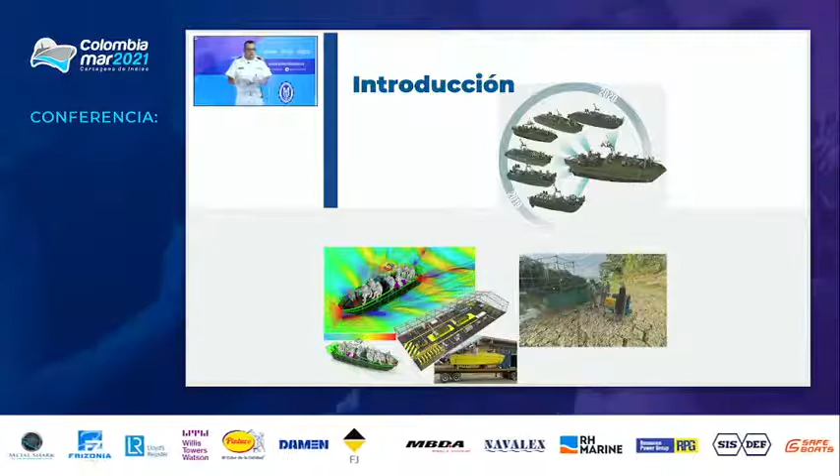Now for this, there were no obstacles. We ran validation tests to be more certain of the complex challenge that lay ahead of us. And this prototype boat we used to validate simulations and to make corrections and modifications to the design. Now, this is the operational requirement that was received from the Western Naval Force.

It is a low draft fluvial combat boat, and what's innovative here? Normally, low draft boats that navigate in shallow waters are characterized by their light weight, but the operational requirement was truly demanding. It was a boat with a capacity of 5 people, additionally a load capacity of 4 people for a total of 9, 400 kilograms of load, autonomy of 300 kilometers, which required enough fuel on board, and we had ballistic protection above the flotation line, which made it a boat no longer categorized as a light boat.

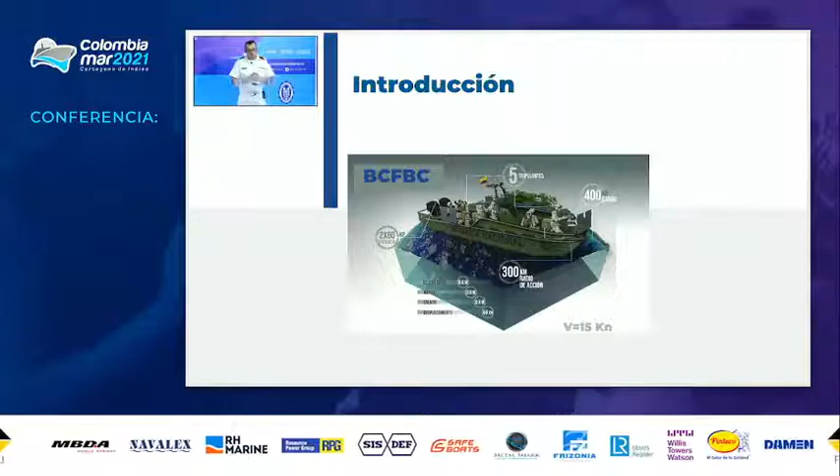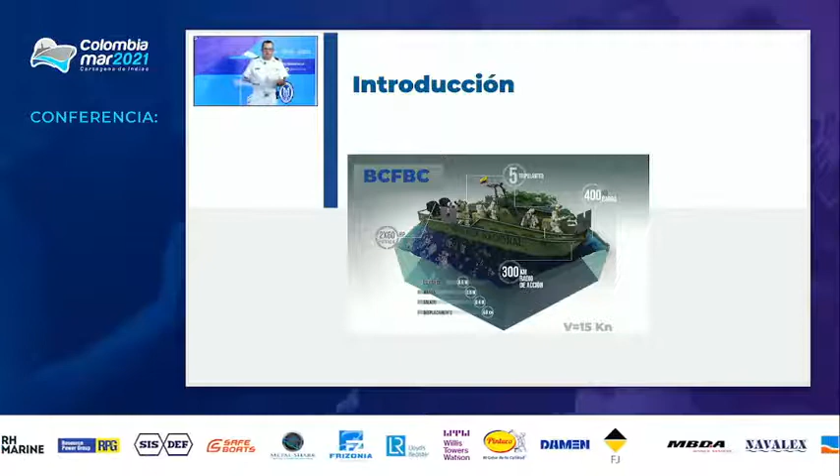Actually, we had a restriction in terms of design, and it was the power. Normally during the design, based on the speed that one might need to achieve, you calculate and forecast the power to be installed to meet that requirement. Now we had a strong restriction, which is that the maximum installed power was 120 horsepower in a 2-engine configuration, each a 60 horsepower engine. So we had these dimensions, which were modified in the subsequent process.

How did we run the numerical simulations? Well, we did 2 types of simulation, one in deep waters and another in shallow waters. They have some significant differences, but also some common things. With the simulations, we solved the modeling of the turbulence with k-omega SST. We used a time step condition, which we applied at the free surface. That is, these surfaces were monofluid, and we applied a restriction on the time step at the free surface so that the number was less than 1.

Now, the computational domain we defined based on the recommendations for ITTC planing boats. For the mesh we used two, one for deep water and another, a multi-mesh, for simulations in shallow water. I will explain them. These simulations were run on our server, which can be considered a high computational power server. We have 128 processors, 256 at 2.25 gigahertz, 512 gigabytes of RAM, and in total it was 128,000 hours of computation without counting the optimization process.

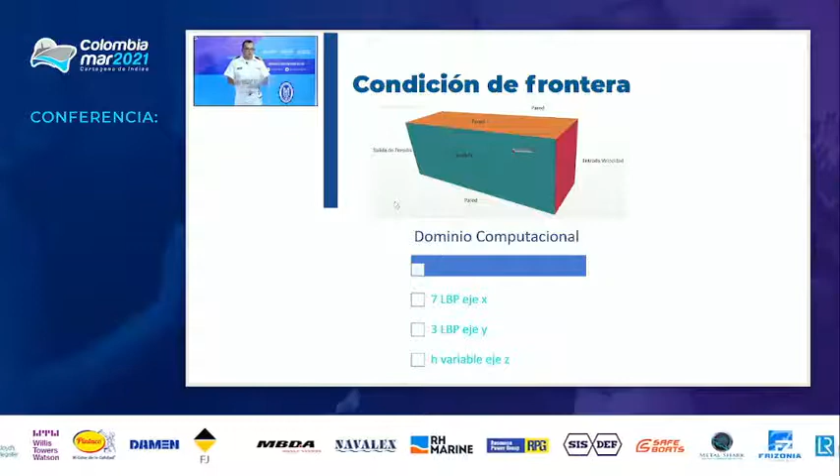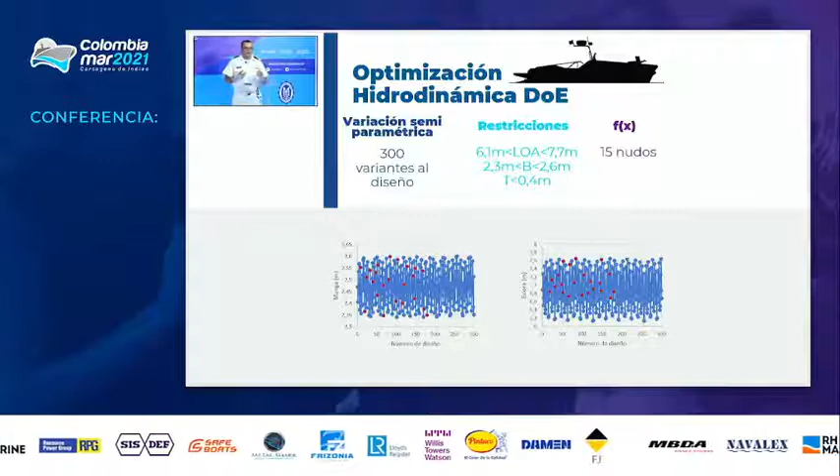Now, with respect to the dimensions of the domain, we followed the recommendations of 7 lengths in the X and 3 in the Y, and in the Z axis, the depth. So to define the forms, we did hydrodynamic optimization. We applied a semi-parametric variation on the initial hull, for which we obtained 300 design variants. What is it? Well, we take a hull that we can use as initial geometry, and we apply restrictions, minor modifications, not varying the nature of the design much. For this specific case, we applied scaling in the 3 dimensions.

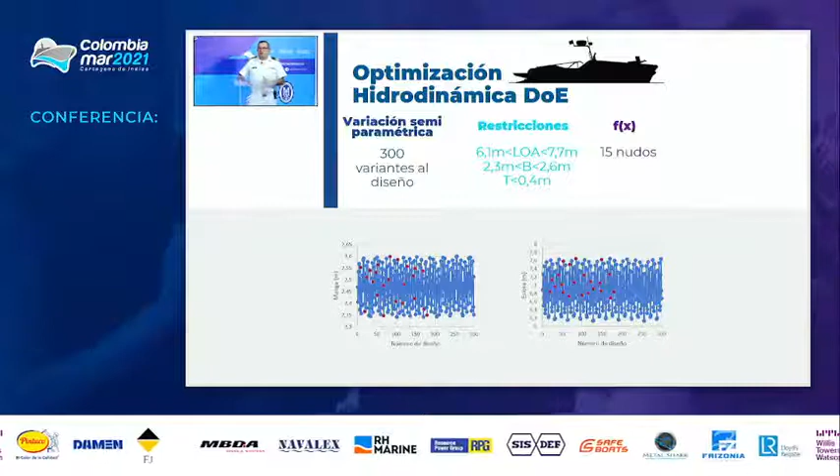Now, which restrictions did we add in this experiment? Minimum and maximum dimensions in the length, in the beam, and in the draft. By restrictions, we meant the load capacity, and the displacement was very high. So to reduce the dimensions significantly forced us to have a very high draft, which was going to increase. This optimization process was done for a speed of 15 knots.

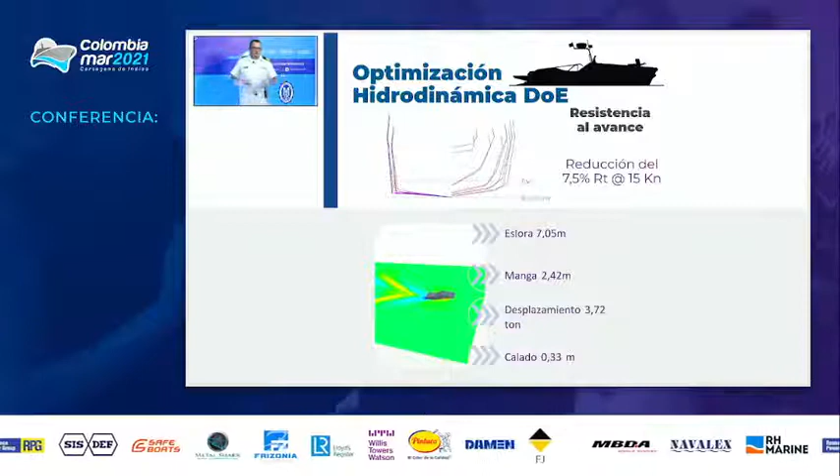Now we can see here the difference in the forms. In blue, we see the initial hull, the prototype boat's hull. And in red, we see the forms of the optimized boat. In the end, we managed a reduction in resistance of 7.5%, and we used a length of 7.05, a beam of 2.42, displacement 3.72, and a draft of 0.33. This forced us to have a boat with a very low keel to be able to meet these operational requirements.

Now, with respect to the configuration of the mesh and the simulation, I previously mentioned that we used 2 techniques. One is overset mesh, and the other is morphing mesh. Now, in these sorts of ships, what happens? They are subjected to drastic pitch and roll movements. So how did we solve this problem during the simulation? Well, we applied initial trim to all the simulations based on the speed that we wanted to analyze. To initially apply this trim, we used the Savitsky series, which gives us pretty useful trim values during early design phases.

Now, for deep water simulation, we use the overset mesh, and that creates 2 domains: the internal domain, which follows the movement of the boat throughout the simulation and generates an interpolation, a connection with the external domain to obtain the condition. For these simulations, we used about 2.5 million cells. And for shallow water, we could not use this manner of meshing due to the shallow depth. We ran the risk that the boat's movement would render this domain outside of the computational model.

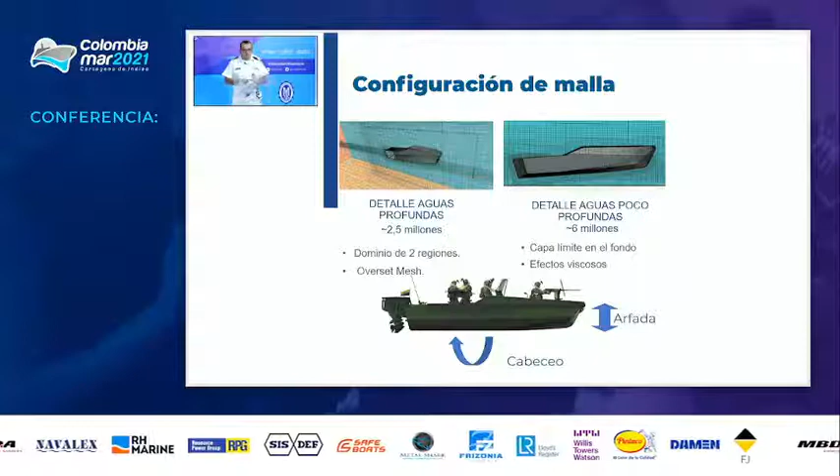So we used the morphing mesh model, which is deformed in one sector according to the movement of the boat. Also, in shallow water, you cannot overlook the viscosity effects. So you need to add a boundary layer, which will represent the bottom of the boat and the river bottom. These will generate viscosity effects, which are highly important in shallow water. So we needed to apply a boundary layer condition, and we could not impose it with a sliding condition. The simulations in shallow water were about 6 million cells each.

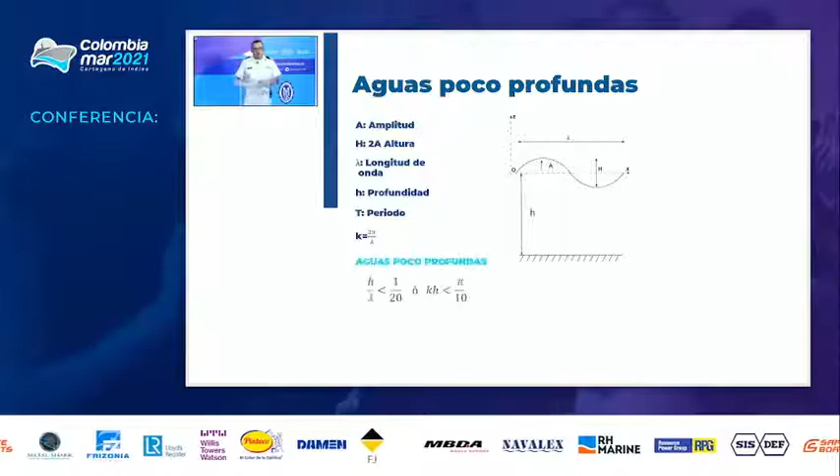How do we know when a boat is navigating in shallow water? Well, there is a way of describing it, which is by describing the surface waves. We know that waves are characterized by the amplitude, the height, the wavelength, the depth, and the period. And likewise, they have a wave number, K, related to the wavelength. Now, from the standpoint of engineering, how do we know that a wave is a shallow water wave?

Well, then we have two relations. When this depth over the length of the wave is less than 1/20, or when this number of waves that I mentioned before falls because the depth is less than pi over 10, there we know that we are working in shallow water. And the equation of the speed of a surface wave, we describe it here as we can see it.

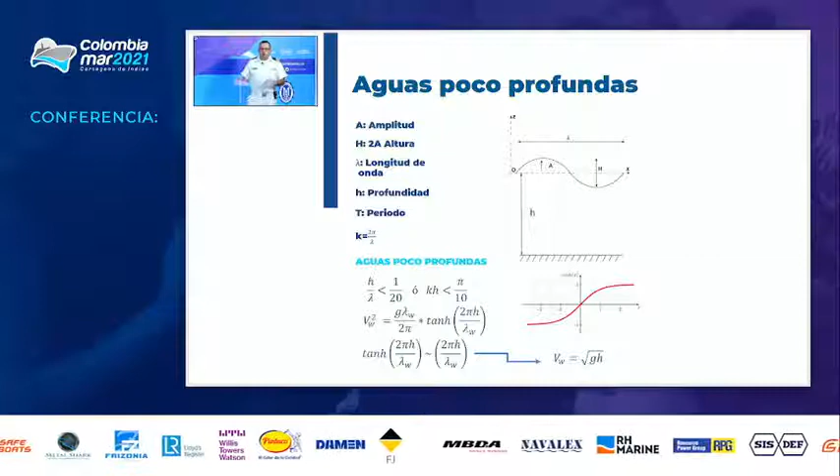What happens with this term, the hyperbolic tangent of two pi times the depth over the length of the wave, in shallow waters tends to 0, for which we can assume that this term is approximately the same as the depth over the length of the wave. And this allows us to define that the speed of a surface wave is the square root of the gravity times the depth. From this term comes a figure that is very important, which is the depth Froude number. As I said, this is the relationship between the forward speed of the boat or the body being analyzed over the square root of the gravity times the depth.

Now, what is the importance of this slide? In terms of the simulations and the performance of boats in shallow water, or ships in general, there are 3 regions: a subcritical, a critical, and a supercritical region. In these regions, different behaviors occur in terms of resistance to the forward movement. In the subcritical area, at depth numbers of less than 0.7, these effects are not significant.

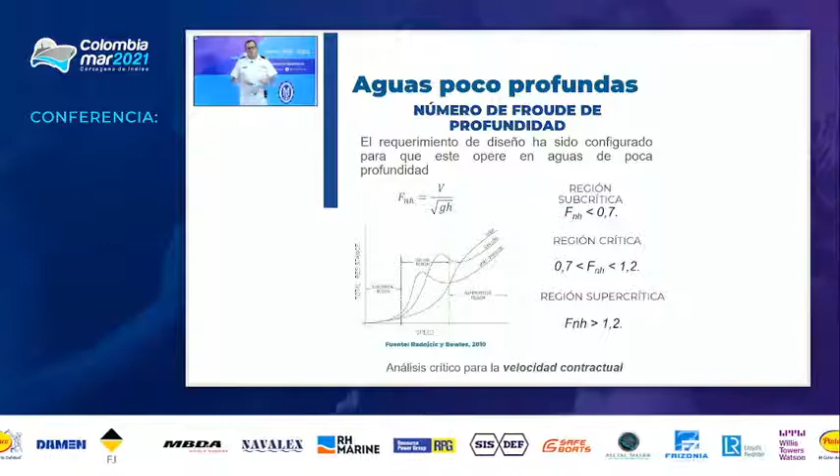And there is, from the standpoint of the design, a region that is very interesting, which needs to be studied, which is the critical, when you have the number from 0.7 to 1.2, where the resistance to the forward movement generates an impact. So there is significant resistance to the forward movement, and this is vitally important because that is what limits our being able to get the boat to a proper speed. So after this, in the supercritical region, you obtain a reduction in resistance to the forward movement. All this is theoretical, and it was proven in the simulations.

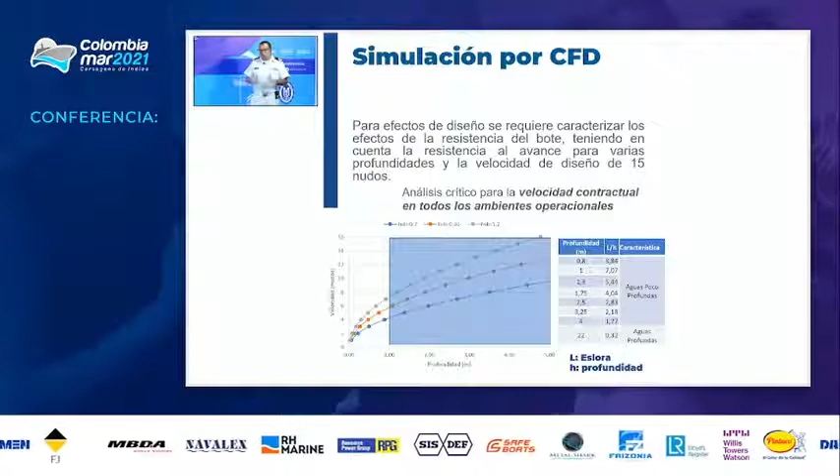Now, simulations were run at 7 depths in shallow water, and they are commonly expressed as the depth where a ship is flowing in relation to the length. This means that when the relation is low, the boat is navigating in deep water, and when it is high, it is navigating in shallow water. Now, the power of the boat was really reduced, and the speed was very much at the limit of that prediction of resistance. Additionally, these marine infantry boats, as you can see in the graph, normally navigate in waters of 1 to 5 meters, which shows that this relationship of the length and the depth and the Froude number shows us that these boats are experiencing these effects of the shallow water.

Over here we have the results of the resistance to forward movement simulation, and we can see that the results of the effect of resistance in shallow water, which is the starting point for the design, were very similar to the maximum peaks of resistance obtained at a low depth. And the importance and the challenge of this design is here. See, because in every operational setting, when the boat is navigating in shallow water, this increase in resistance could not be too high, or we would not have enough power to overcome this peak and then achieve a contractual speed.

In case those 120 horsepower installed would not have been able to overcome those resistance peaks, it is the difference between the boat getting to 15 knots or a little over, or staying below 7 or 8 knots according to the depth. Now, this would not be a significant problem when one does not have a limitation in power, because you guarantee that that maximum peak of resistance will be overcome easily. But this was our main challenge and our main concern.

Now, a way in which the academy demonstrates this behavior of resistance to forward movement is by a graph based on total resistance and the depth Froude number. And here we can see that the biggest effect occurred at depth numbers between 0.9 and 1, having a maximum peak at 0.95, which adds great value to our work, because the simulations were validated with what little theory exists. Actually, the state of the art in shallow water, there's not that much. There are some studies for fast moving boats, Series 60, Series 62, but we didn't have bibliographical sources in shallow water, and much less experimental validation campaigns as we did for this work.

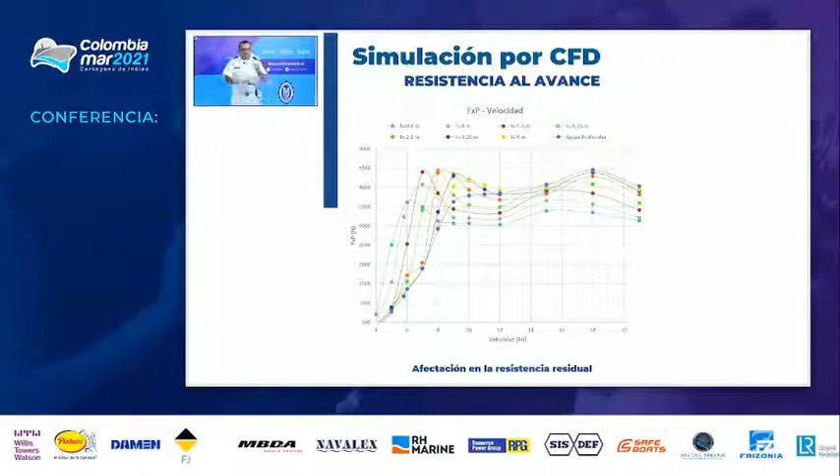Now, this change in the resistance to forward movement does not happen with every component of resistance. We know that there's a viscous component and a residual component. The change in resistance to forward movement occurs in the residual component, but it is the component of greatest importance in resistance to the forward movement, accounting for about 90% of the resistance. In the viscous, you get a reduction, but it's not significant.

How can we also validate our studies? Well, as I said, the theory and the state of the art in shallow water is not extensive, and experimental trials are very much limited. First, because they're costly, and second, because for a model basin to validate that it's somewhat hard. So experimental tests are limited to maybe 3 or 4 different depths.

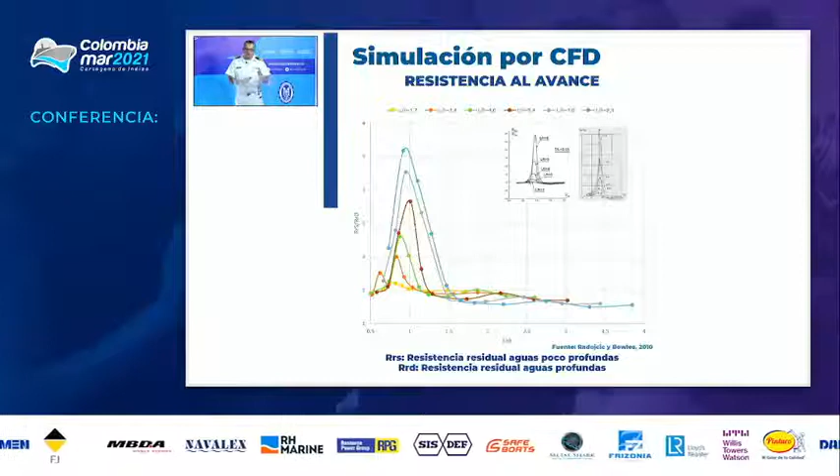We analyzed a total of 8 depths, and we can show them in this graph, which is based on the length over depth relationship that I commented about, and also creating a ratio between the residual resistance in shallow water and residual resistance in deep water. Over here, we can see that the performance obtained was the same. Radojcic and Bowles, who are the ones who have worked the most on this topic, resistance, the pattern was completely similar in the critical area, in the 0.9 to 1 in the depth number.

Another aspect of interest and highly important for the Navy, for the Marines, is to understand the pattern of waves that is generated in shallow waters. Traditionally, we in naval architecture know about the Kelvin pattern, which is made up by divergent waves and transversal waves. This divergent wave is 19 degrees with 28 minutes, but this pattern only keeps up to a Froude number of 0.4. Now, what happens when we move above the 0.4? The pattern of waves is totally different. In the critical zone is where we must focus our interest and operational teaching to the pilots.

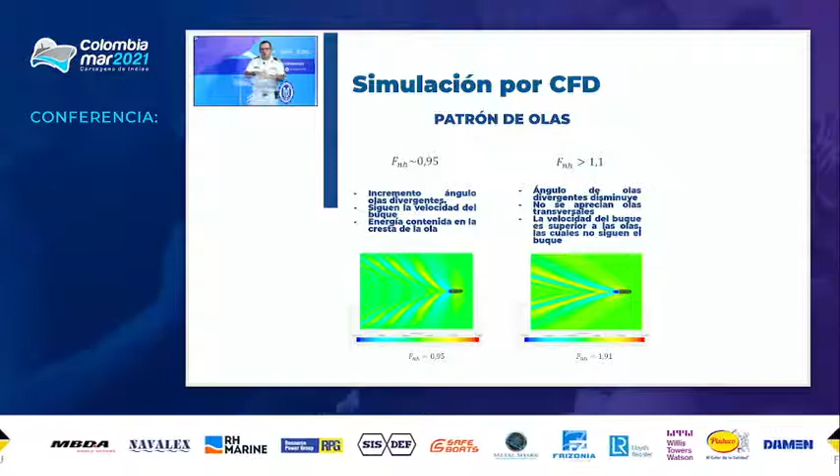Because in this condition, because of the definition of the Froude number that I showed you, the equation of it, we can determine that the speed of the boat over the speed of the wave is going to be the same. So in this Froude number, the wave follows the boat as if it were navigating with it. Now, what happens in this condition? You get a peak at the height of the wave, and therefore the energy of the wave.

And this is vitally important because when a marine boat is navigating in this regimen, we normally navigate in riverside populations where you have small boats which could easily be affected by this energy of the wave. So we also transferred knowledge on the speed at which they should navigate to prevent these problems, if it's a speed below this critical Froude number or above, when this energy is reduced.

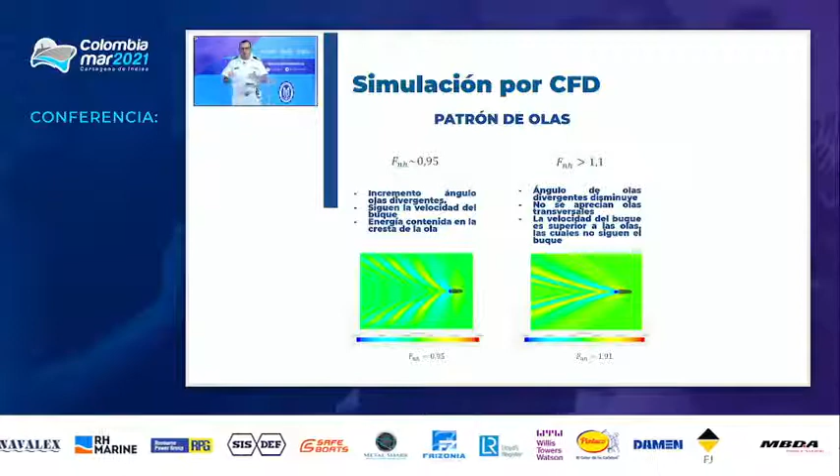Now, when this number exceeds 1.1, the wave pattern changes completely. You only see the divergent wave, and its angle is reduced drastically. In that condition, the speed of the boat or the body is so high that the wave pattern is not capable of following them.

Lastly, we ran some validation tests, and the validation tests were not limited to speed tests. At the corporation, to validate this model, this design, to be certain of their performance, we did speed tests in actual live operational areas, maneuverability, tactical angle, longitudinal and transversal angle, which will be presented in a future article. But in this particular case, I will show the results of the experimental tests, speed tests.

We did these tests in Cartagena. For those of you who don't know, Cartagena is a city in the department of Bolivar, located on the Colombian coast. And in its internal bays, we did the test on shallow water with a depth of anywhere from 16 to 22 meters, and the Froude number ratio for the boat was 0.3. In this navigation condition, we reached a maximum speed of 16 knots. We also ran some tests in the back canal, also within the Bay of Cartagena, and we found depths of 2.5 and 3.5 meters.

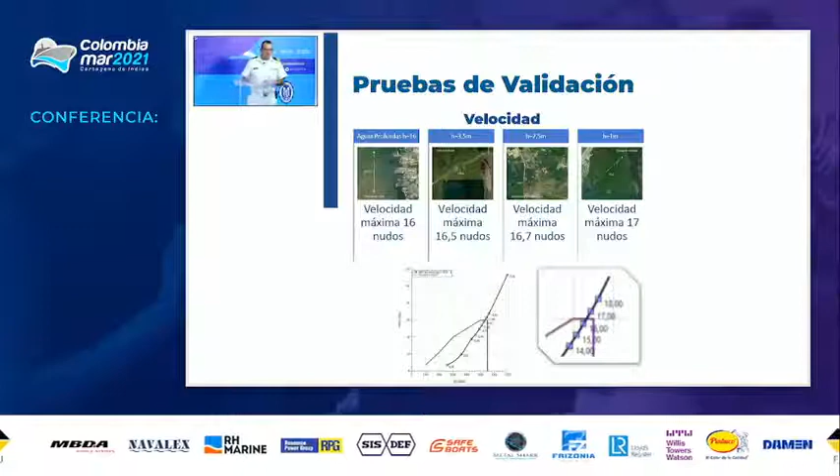Now, as conclusions, we see that the results of the resistance to forward movement in shallow waters were completely coherent with the experimental studies and the existing numerical studies, which, as I said, are very scant. The subcritical, critical, and supercritical areas were identified, and the change in the resistance to forward movement in each, right? The critical area being the most important one.

And in the supercritical, we obtained a reduction in the resistance to forward movement, which ultimately led us to a higher speed. And that's the next conclusion. We evidenced an increase in speed at a Froude number greater than 1.1 as a consequence of the reduction in resistance. We also verified that the variation of resistance is due to the residual component and not the viscous component. Also, the generation of waves.

To be able to tell the crews that they have to be careful when navigating in this regime, because, first, the resistance is highly affected, and second, the wave generated by the wake has a lot of energy, and it will generate damage for the riverside population and other smaller boats.

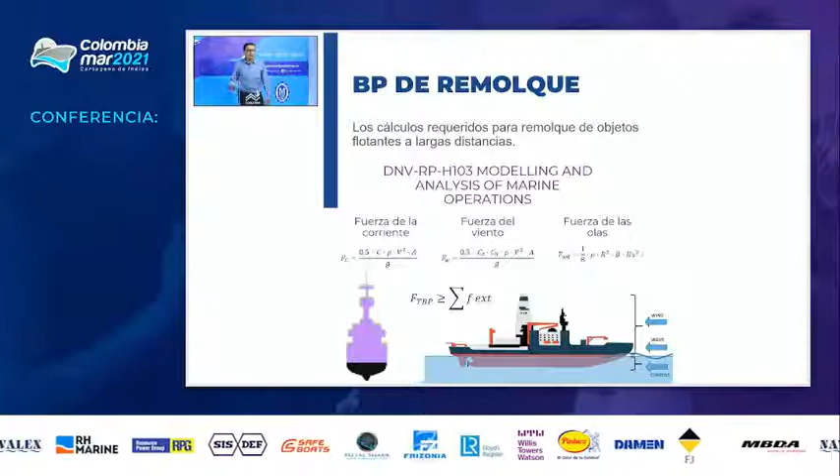Values such as speed and the area, as well as the submerged transversal area, are taken into account. Also, the waves that might exist in the area, considering the significant height of the wave, the speed with respect to the vessel of waves, and the beam of the ship, as well as its draft or depth.

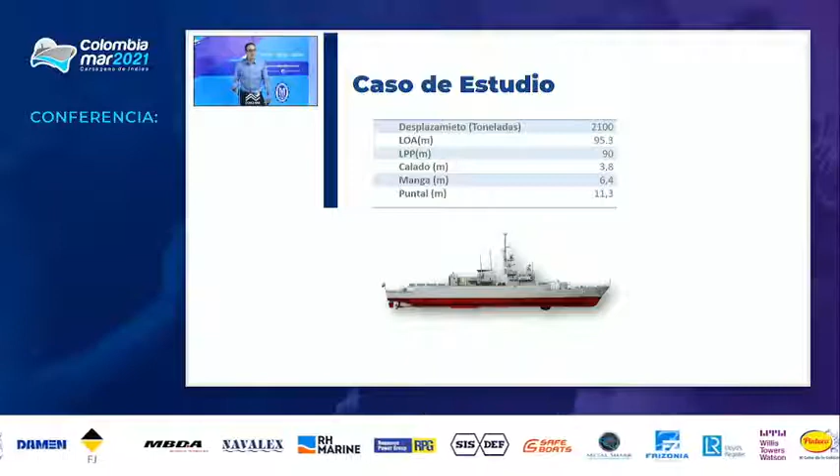For our particular study, we made an emphasis on the Almirante Padilla class, which is a considerable size ship, and for our case, this vessel implied the biggest challenge when engaged in berthing operations in the bay. These are the characteristics of the ship with a considerable displacement. It is a ship that does require the assistance of a tugboat to perform the maneuver.

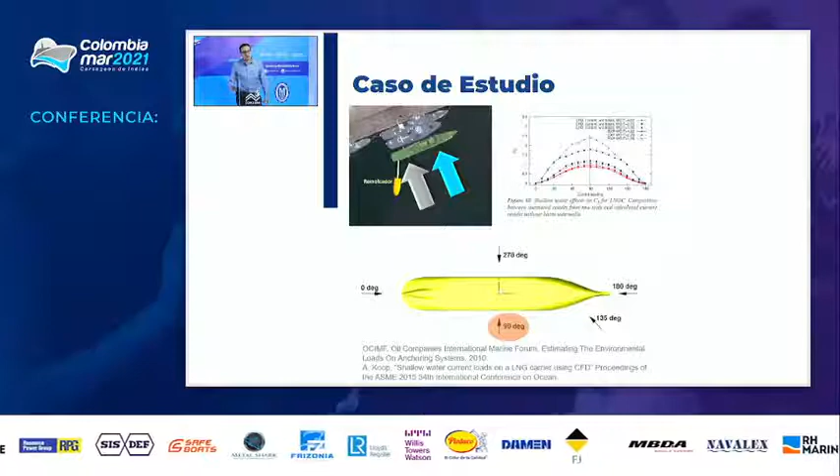So it is important that during maneuvers, the tugboat assists to help with the heading, and it turns with respect to the geometric center, but it is not fully pulling the vessel from one side. It just helps the vessel so that it can either sail off or berth in.

So we use approximations of large ships such as tanker vessels or container ship vessels or liquefied natural gas, as opposed to the hull that we have here of the frigate, the Clase Padilla. With that, we could get different results.

So the methodology that we have developed consists of meeting the requirements of the ship that we can use, then compiling the local environmental variables, that is the current velocities and directions, wind velocities and directions, the significant height of the wave, the depth of the port, and then considering the most extreme case as the maximum record.

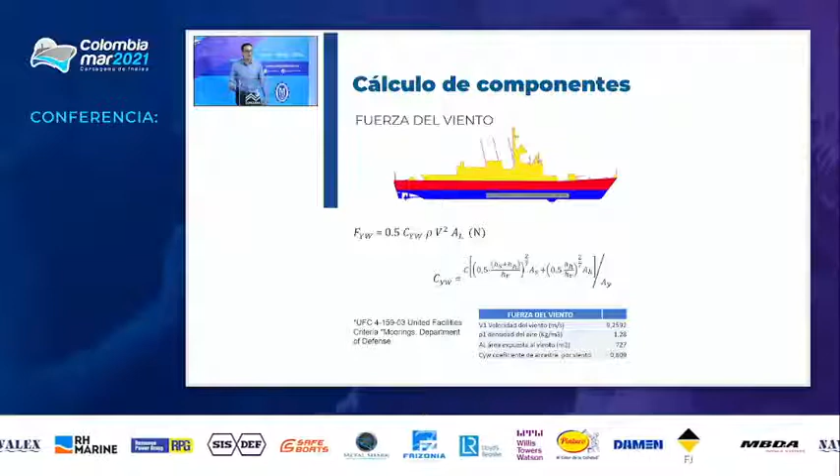For this method, the formula used is that delivered by the Department of Defense of the United States in the UFC manual. For purposes of wind, this formula takes into account the Velic area of the vessel as well as the hull as exposed to wind, to estimate the drag coefficient that the wind exerts on the ship. That way you can obtain the value of the drag coefficient of the Velic area and determine the strength that the wind exerts on the ship.

Similarly, the same reference is used to apply a formula, but in this case taking into account the effects of the shallowness, of the low draft, both of which are influenced by the low draft, right? We have a drag coefficient basically where we don't have a distance below, and from there on out, considering the change in depth, you could estimate the transversal drag coefficient on the ship. In this case, given this formula and some additional coefficients also formulated in the bibliography as the K value, we get a drag coefficient of 1.29.

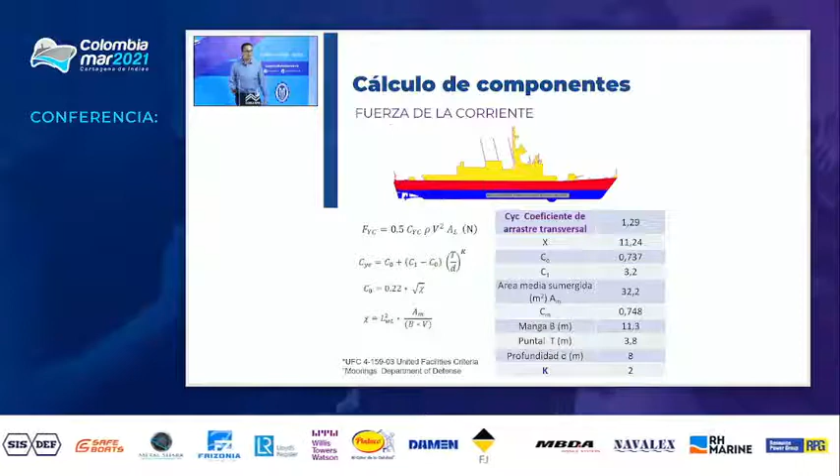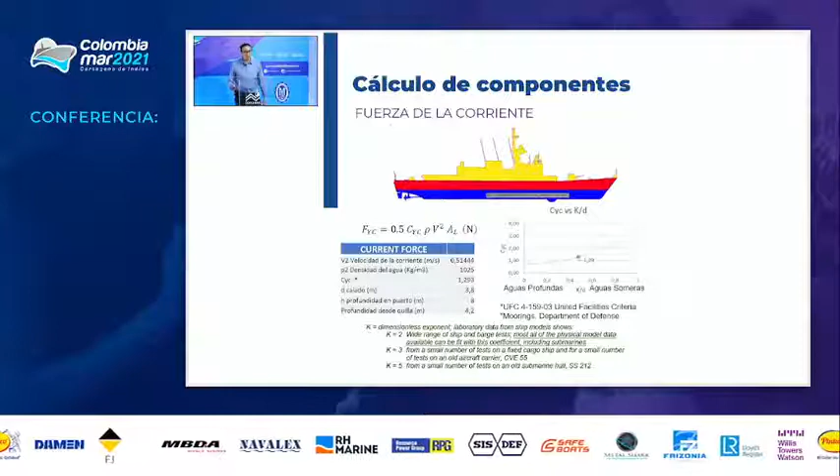On this slide, we can also see the big effect that the K values and the value of the depth have on the transversal drag coefficient, and how that force can affect the end of the calculation by increasing that output, considering the variability, the changing nature of these variables.

We also take into effect the inertial forces that occur during the sail off and the berthing, which correspond to the acceleration or deceleration of the ship when arriving to port. Now, this force is important considering that it not only includes the inherent inertia of the mass of the ship, but also the added water mass and the effect of acceleration.

Now, what you see on the slide shows us one of the formulas presented by Henk Hensen on the use of the tugboat in port, where the formula already assumes a uniformly accelerated or decelerated movement to estimate these values of the inertial force, but adding some additional security factors.

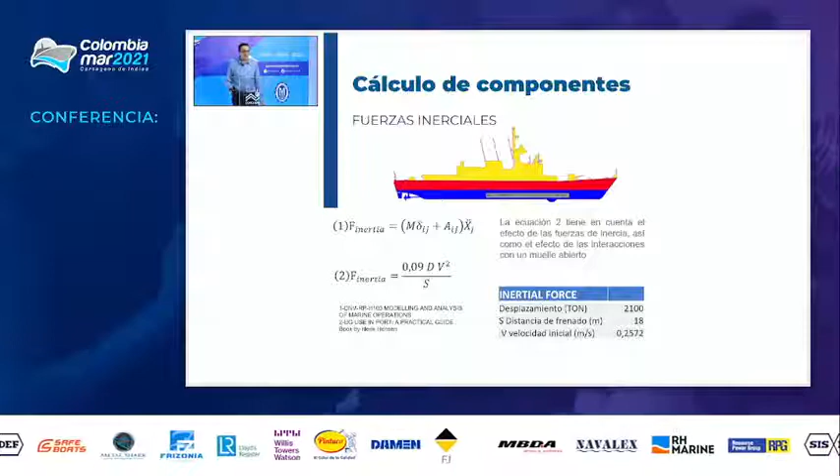It is important to take into account that the maneuver speeds at this point in port are about centimeters per second. So eventually those accelerations might be low, but during emergency cases they may also be high and must therefore be considered. Of the three formulas that I showed you before, the most representative corresponds to the effect of the force exerted by the current on the ship.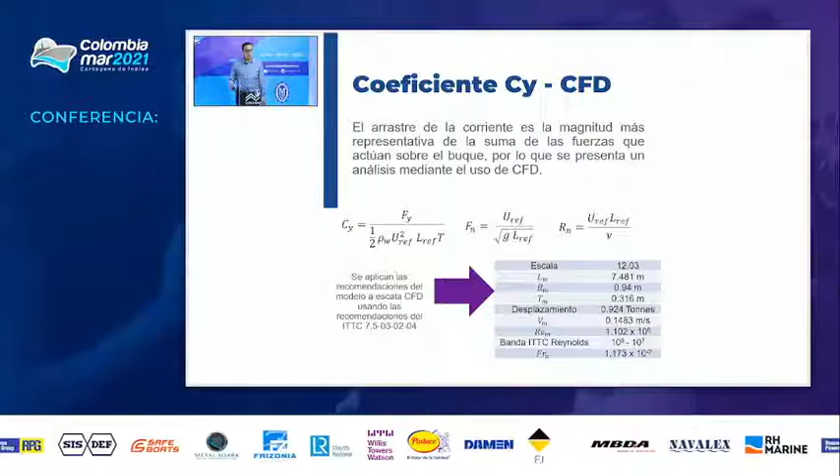Taking that aspect into account, we make use of the CFD tool to estimate a more appropriate, more real drag coefficient based on the hull shape. We do the validation of the CFD working on a scale boat. We had a Reynolds as ITTC recommends and Froude of 0.1. Now the boundary conditions are the same as established previously in the bibliography, where you have the length to port side, starboard, bow and stern, and upstream.

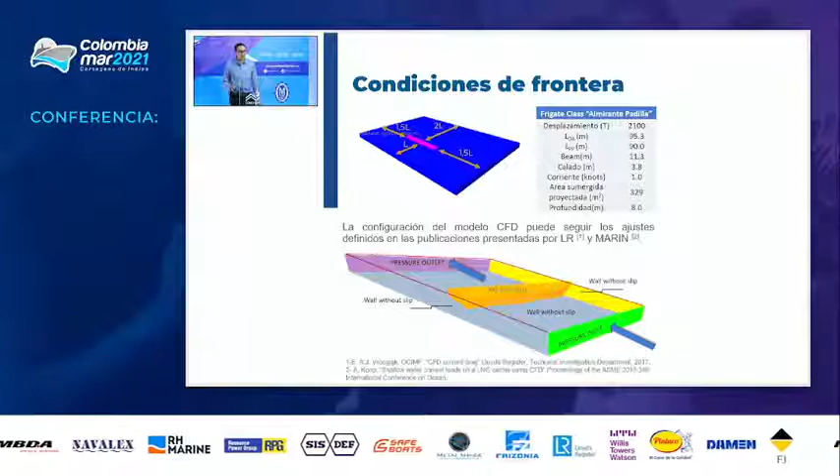The borderlines that are imposed on the model are walls without sliding, and at the bottom, two pressure inputs, and then non-sliding borderline conditions on the hull. Now for the meshing, we used the K-epsilon model, and we also incorporated a Y plus of 30 for the limit layer with 10 prisms and a thickness of the first limit of 0.04 meters. Notice that as opposed to resistance to forward movement, in this case we could not use symmetry, and we need to simulate the complete domain.

In this case, we applied refinement under the keel in such a way that one can capture the low draft and the effect of that on the boat, as well as on the stern and the bow. We performed 3 simulations where we increased the number of cells incrementally, and we obtained a drag coefficient value of 1.55, with a number of cells to reach that of 21 million.

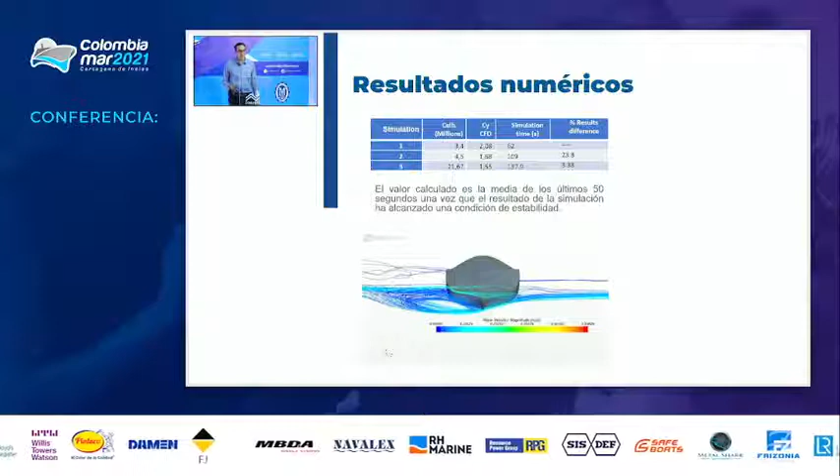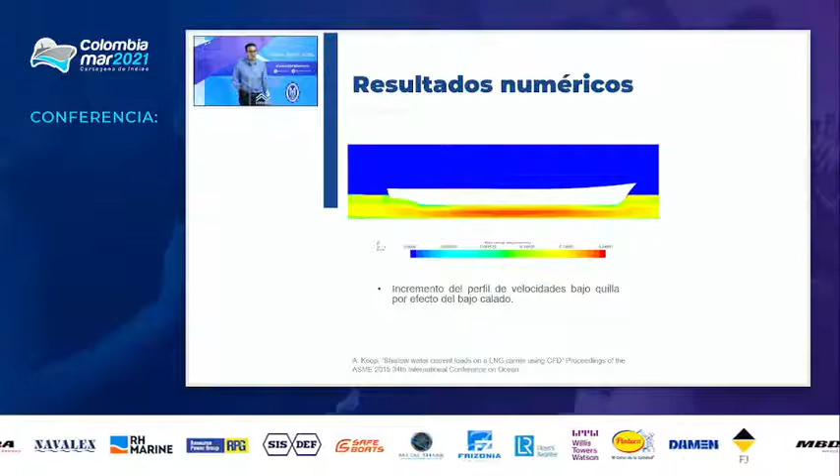Here we can see an example of the result: the hull shape, which is somewhat delta shaped, but to the side, as we saw previously, it creates a blocking effect in the zone, and it generates some flow lines that eventually affect the drag coefficient. In addition to that, one can see the restriction of flow under the keel and the increase of speed in the middle zone, and to the side, a more standard speed according to the flow that was configured.

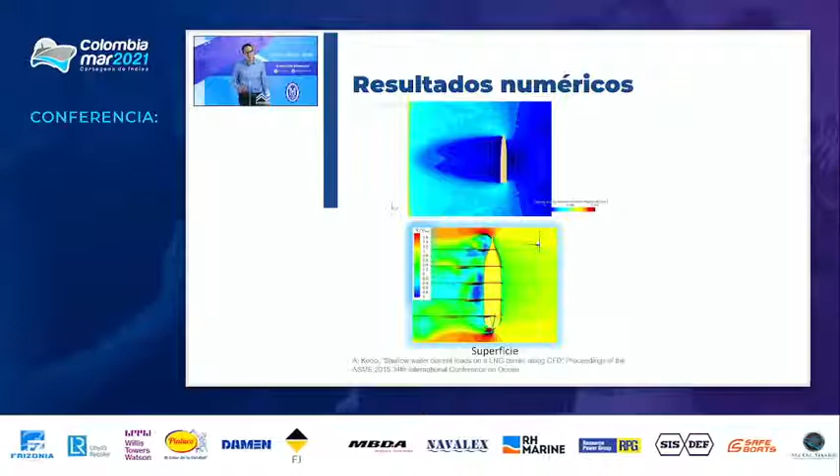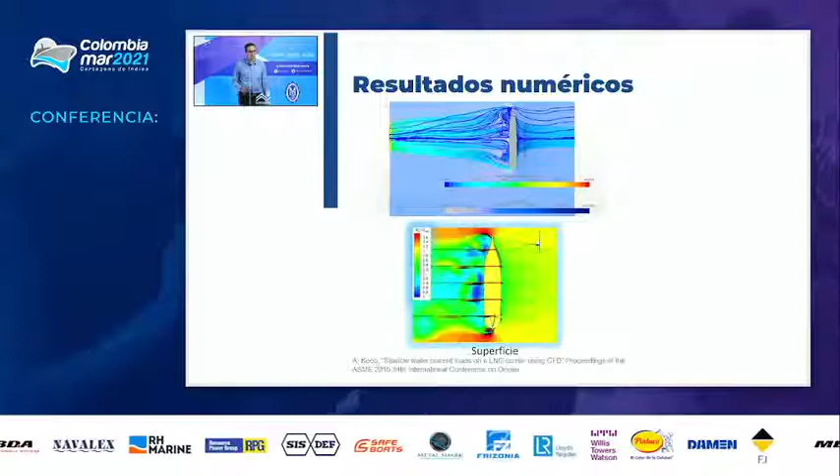Here we can see the comparison between the results presented by the paper contrasted with our results on the surface, and you see the wave pattern, a very similar pattern, considering that on the stern and bow, according to this model, they use higher speeds than our model. Again, same effect, but now considering the values of the flow zones, again showing the effect that the hull shape has to create certain patterns which could affect the drag coefficient. Over here are the results that similarly show these effects.

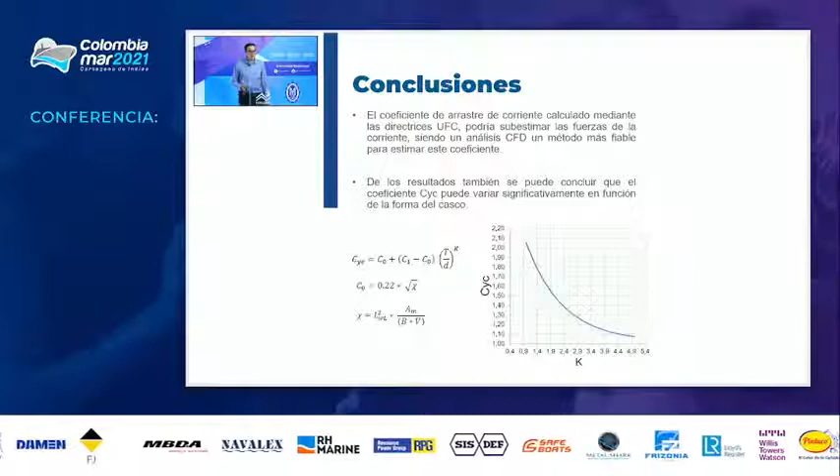And then, the conclusions. It is important to take into account that these analytical methods as presented by the bibliography are not necessarily accurate, and we recommend making use of tools such as CFD to estimate these values of the drag coefficient. In our case, by doing an inverse relationship in the formulation, we got that to obtain the CYC value of 1.55, we have a K value of 1.9, which is somewhat different from what we saw in the literature, which was 2, but significantly impacting the drag values.